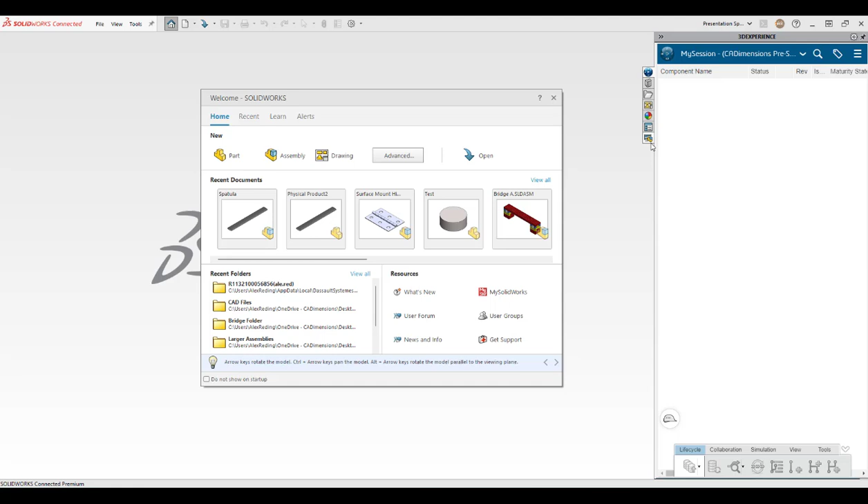To use this setting, we first want to launch SOLIDWORKS Connected. Once launched and connected, I'm going to check my local cache to see if I have the file I want to work on saved before going offline. Just to be sure, I'm going to search for it and open the latest revision from the platform. Double check to make sure all of the parts within your assemblies are the version you want to work with.

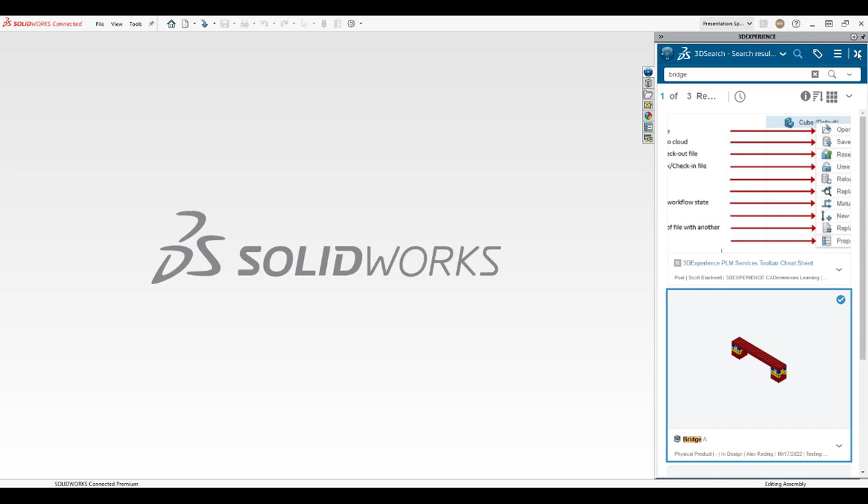In this case, I want to update all of these to the latest revision. Once updated, make sure to lock these files in the My Session panel before closing the document. This way, no one can save changes to them while you are working on them offline.

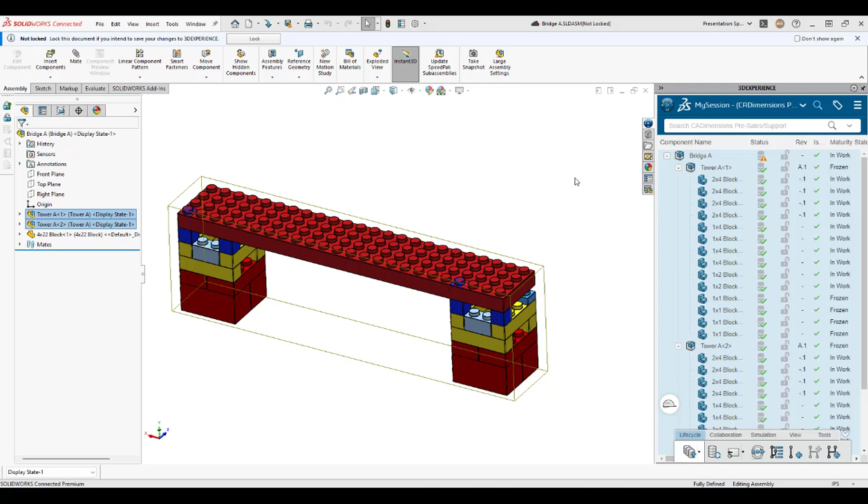When saving parts from the cloud, you're actually downloading and saving the file to work locally on your PC. So you should see it now updated in your local cache. Click the refresh button at the top to confirm. Now, close all documents as you cannot have anything open when you take your license offline.

In the top right-hand portion of your SOLIDWORKS window, you will see your user initials. Click this to open a drop-down and select the option Work Offline. In the pop-up window, you will see an explanation of how to work offline, as well as instructions to create a desktop shortcut and to lock and download any files from the cloud before going offline.

At the bottom, you will see a section to input how many days you plan to work offline for. After that amount of time you put in the box, SOLIDWORKS will automatically attempt to reconnect to the platform and will not function properly until you do so. You can manually choose to reconnect to the platform at any time, so make sure to plan accordingly.

A second dialog will appear to prompt you to open and move any other native apps into the offline mode should you need to use them. Since I do not need any others than SOLIDWORKS, I will select to work offline without other apps. You'll see a notification at the top of the screen stating you are working in the offline mode.

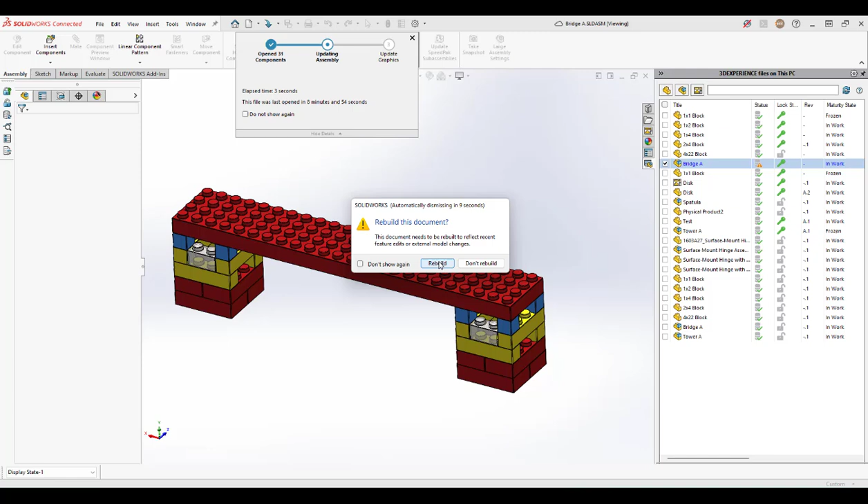From here, we will go into our local cache and open the file that we previously downloaded and locked. Any changes you make to the part or assemblies will be saved to the files in the local cache until you reconnect to the platform.

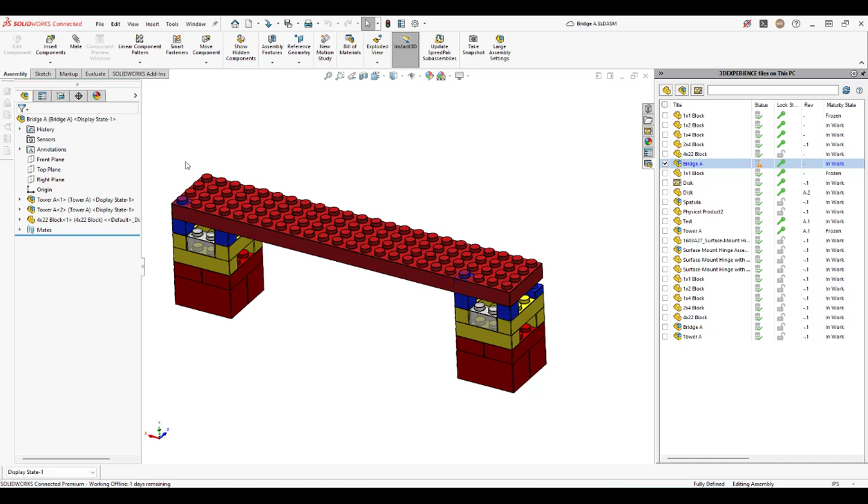Once you're ready to go back online, make sure all files are closed in SOLIDWORKS and click the Work Offline symbol in the top right. A dialog will ask if you'd like to reconnect to the platform. I'm going to select Yes, and then wait for the My Session pane to load and my collaborative spaces to show that I'm reconnected.

Note, make sure that once you are reconnected, you are working within the collaborative space you want to be in.

Now I have reopened the file I was working on from my cache, and I'm ready to update the version on the cloud. Once opened, you'll see the platform recognizes these files. It sees that I have them locked, and it's prompting me to save the modified files to the cloud.

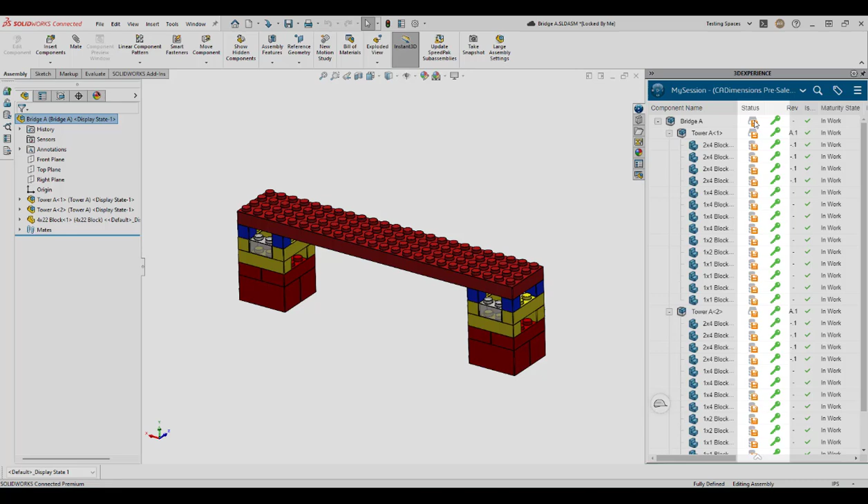I'm going to save all of the files within this assembly by right-clicking on the upper-level assembly and selecting Save with Options. Here, it will tell me which files have been modified, their revisions, and bookmark locations. Once all is good, I will click Save.

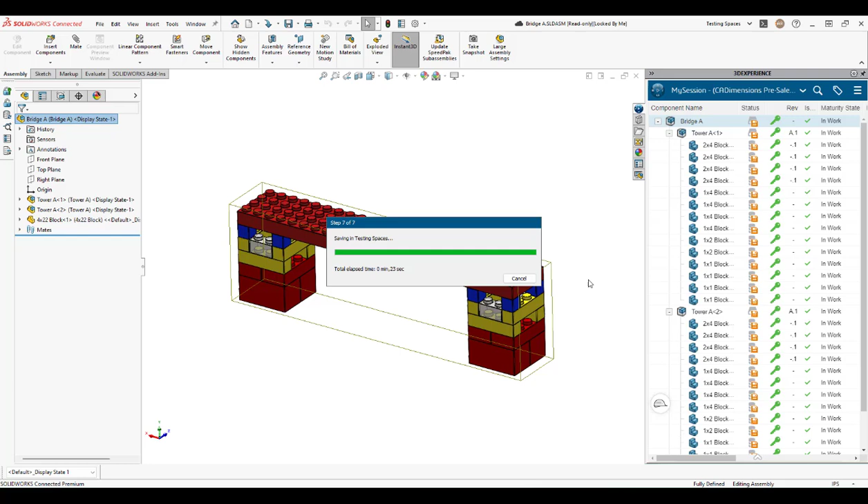Now, after showing how to save and work with files offline in SOLIDWORKS Connected, I have reconnected and updated the files on the 3DX platform.